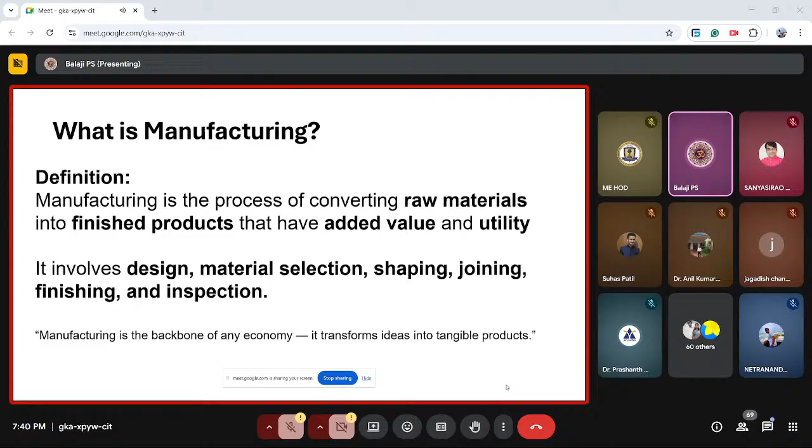Now we need to understand why we have moved from manufacturing to additive manufacturing — what reasons have pushed us. The first is the need for higher production, meaning mass production. When you develop a new product and bring it to market, as soon as commercial benefit starts, many people want to buy it, so you need to produce quickly.

Second is advancement in tools and materials. If new materials with higher strength come into the market, the tools that shape them also need higher strength, so advancement is pushed. Next is labor cost reduction — the cost of a product also covers labor cost, so if 5 laborers can do the work of 10, labor cost is reduced. Quality, precision, digital transformation, and sustainability goals are also reasons pushing us from simple manufacturing into advanced manufacturing concepts.

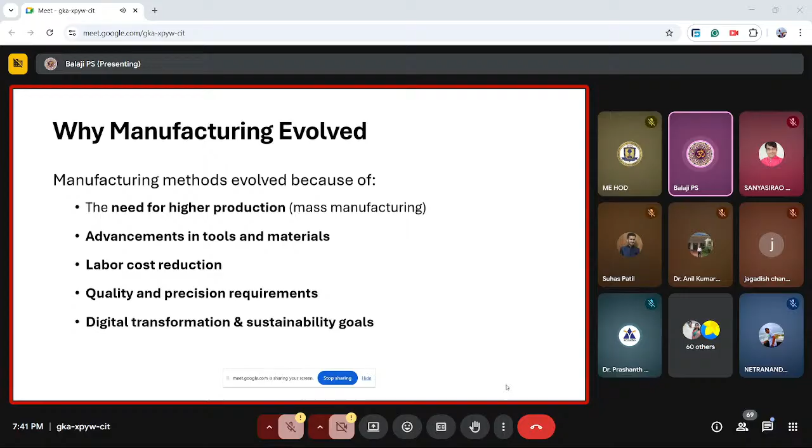If you see how manufacturing started evolving, take the Stone Age, where people made weapons used to hunt animals using a manual method to cut stones into sharp objects. Using the sharp object, they were able to hunt, eat, and enjoy the food. But sometimes the stones were very heavy and had high strength, so they could not manually do it.

So they started inventing mechanical tools to machine the material, and the transition from manual into machine happened. Then they thought, why machine it manually when I can convert it into automated by incorporating a CNC program? So from manual it went into mechanized, and from mechanized it got into automated, so now CNC programming was happening.

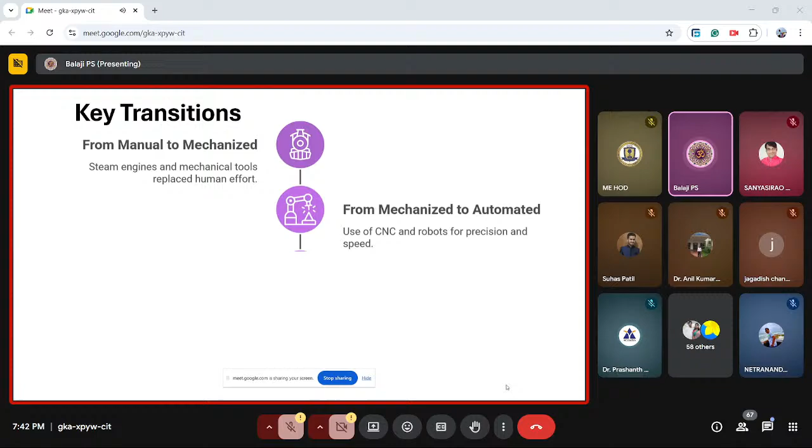On an overview, it might look like we went from manual into automated, so the job is done. No. Later, the world transformed from automated into digital. In the mechanized stage, I had to use my drawings made on paper. For example, the engineering drawings we teach students prepare them to make the CAD drawings needed for design.

But nowadays, very few people use drawings in hard copy. Majority use drawings in soft copy, and nobody is drawing the drawings manually. They only make drawings using CAD software like CATIA or SolidWorks. Once the product is ready, you can even check it using simulation, which gives a digital form of the object.

So from mechanically making, to physically making the product or design, into automated, we have reached. It might look like we have completed the circle from manual to digital, but no. Later came the advancement called additive manufacturing.

We will see how this additive manufacturing is helping us in the coming slide. But you need to understand: from manual, we went into mechanized, then automated, then digital, and finally we are in the era of additive manufacturing.

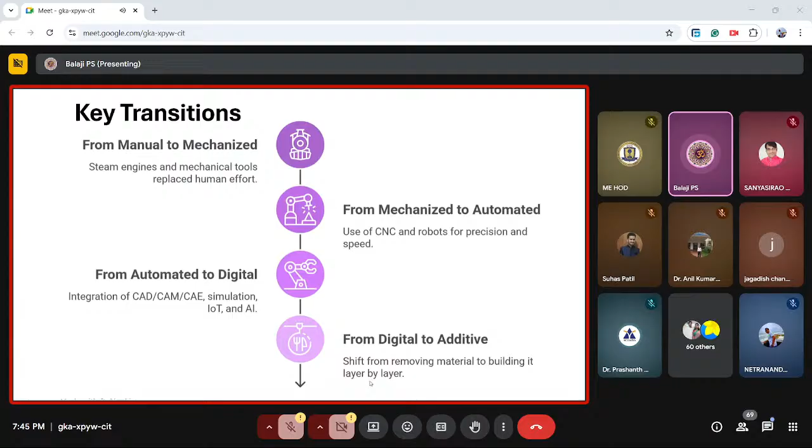So such great things are possible in additive manufacturing. In the coming years, homes of the public will also have a 3D printer, and that will become part of household appliances. So when I talk in terms of manufacturing, there are only three ways in which I can manufacture the product.

The first method is subtractive. Subtractive means what? I take a raw material, the billet — I call it billet technically — then I remove the unwanted portion of the material to get my shape. So these all come under the concept called subtractive techniques, like milling and drilling.

What I am doing in turning — I take one block, for example in a lathe machine. If I want to make a step shaft, I will take a shaft which is complete, then slowly remove some diameter of the shaft until my desired diameter is reached. Such processes are called subtractive.

So once you overcut — for example, instead of 10 mm, you cut too deep to 11 mm — is there any control possible? No, because what is already subtracted is already gone forever. So these are all concerned with subtractive manufacturing.

The second technique is called formative — giving shape to the billet. One of the easiest ways to understand formative is our roti, which we make at home. When making a roti flat, we first make a solid spherical shape of dough, then use pressing to make it flat and round. So the shape is given to a definite volume of material — this is called formative, meaning I'm forming a shape from the given input.

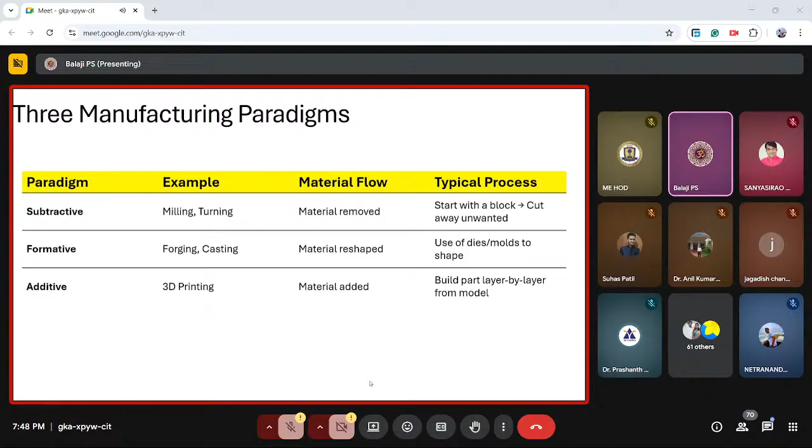Now why did additive manufacturing start coming? What is the need? If traditional processes like casting, turning, and milling could satisfy our need, we would not have gone to additive manufacturing. But still we went to it because traditional processes are efficient, but we don't have design freedom. For example, I want to make a spherical shape, but inside it some design has to be incorporated. It is not possible in a traditional process. But I can make any complicated shape and size in additive manufacturing. So the need is pushing me towards a new technique.

However, additive manufacturing is slower, but the designs it can make are unlimited. It is not limited by any kind of geometry. You can make the geometry any complex one, or you can make geometry which is simple.

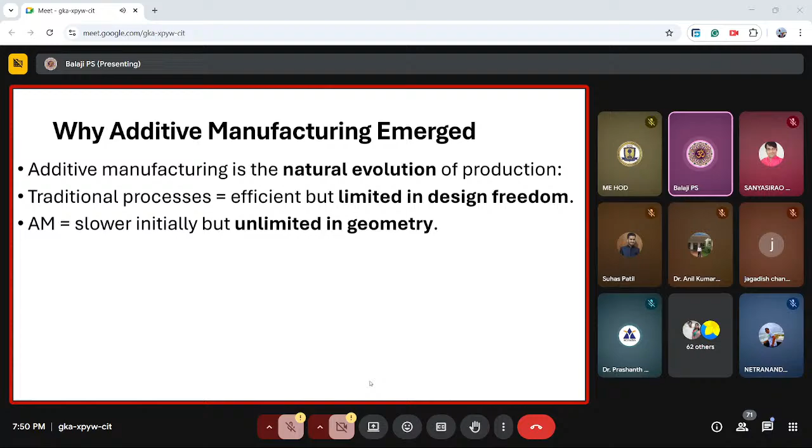But I wanted to say one thing. If we have an option between choosing additive manufacturing and traditional manufacturing, what should you choose first? There is no need to even think twice. If your traditional method can satisfy your need, please go ahead with traditional methods like milling and drilling, that is absolutely fine. You can move to additive manufacturing only when your traditional and conventional method fails. Why? Because additive manufacturing will give you a final product, but the strength of the product is not as good as with the traditional process. But you get some product which is not possible with traditional methods. So that is the added advantage.

Another major use of additive manufacturing is that I can convert a CAD model directly into a print without needing manual input. I design a model, then directly send it to the computer to print. Second, rapid prototyping is possible, which means that once I design something in my brain, how do I explain it to other people? Immediately I make a design and immediately print it. So showing is much easier than explaining in words.

And third is lightweight and optimized design. This means that if the weight has to be optimized or reduced, all of that is possible in the CAD model. So when the model is directly sent to the computer for printing, your model will also be lightweight and optimized, giving waste minimization and sustainability goals. Here we are only creating the wanted material, meaning unwanted space is not even created, so the wastage is very minimum. At the same time, you can have a filament which can be printed in any shape or size as per the requirement. If I get a requirement, I will print it. So I will only keep the raw material with me, not the complete product.

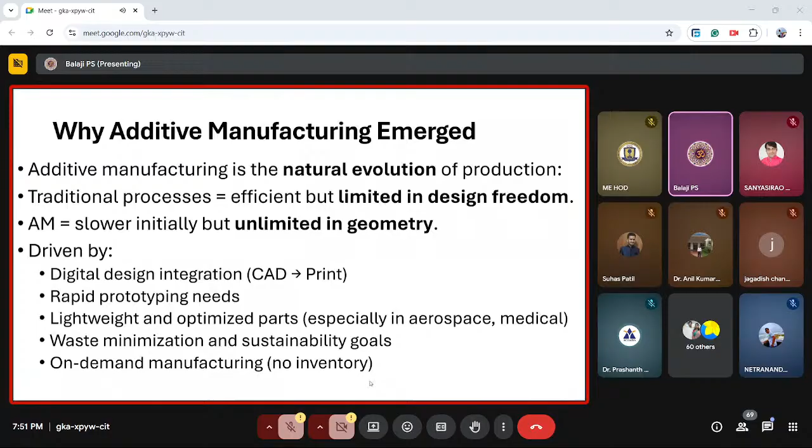So these are the advantages pushing us from the traditional method into the additive manufacturing technique. Now, how did additive manufacturing start evolving? It is 2025, so you have to go just 40 years back. The foundation of additive manufacturing started in the year 1981 in Japan. When additive manufacturing was proposed in the early stages, people could not even understand what this additive manufacturing was. They called it rapid prototyping.

How did rapid prototyping become additive manufacturing? Rapid prototyping is a concept where you need to make a small scale model of your design so that others can understand it. But in order to make the small scale model, I had to go to a manufacturer and explain my design. Instead, I will have my own manufacturing system, a 3D printer, which will design my prototype so I can show it to people. That's why the name rapid prototype started coming into use, because you can quickly make the prototype so that others can understand.

Later, slowly, improvements have driven this until the year 2025. Rapid prototyping or 3D printing has become such an advanced and mature technology that even a school kid, once he understands how to use a rapid 3D printing machine, can make use of it.

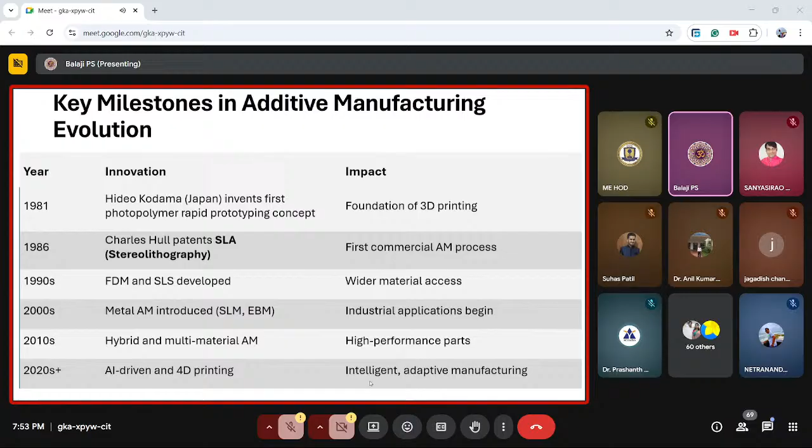So now, since all along the presentation we are going to focus on additive manufacturing. We started from what is manufacturing, then we went on to the three major paradigms: subtractive, formative, and additive. Additive manufacturing lies in the third method. We saw what is the need for additive manufacturing. Now we are coming to the actual process called additive manufacturing, so what are the step by step involved in it?

Of course, the first thing involved is having a CAD model. This CAD model can be made in any software like SolidWorks or CATIA. So many CAD models are available. The first job is whatever is in your mind, you need to put it into the model.

Once you make a model, you need to convert it into a .stl file, that is standard tessellation language, because we have a 3D printer and the CAD model is made in a software like SolidWorks or CATIA in a very specific format. This format has to be converted into a 3D printable format, the .stl format.

How to convert? It's very easy, like converting a Word file into a PDF. Just go to File, Save As, select the format and give a name. Boom, done. So converting into STL is the next step. Now we have a model in the computer converted into a .stl file. What is the next step?

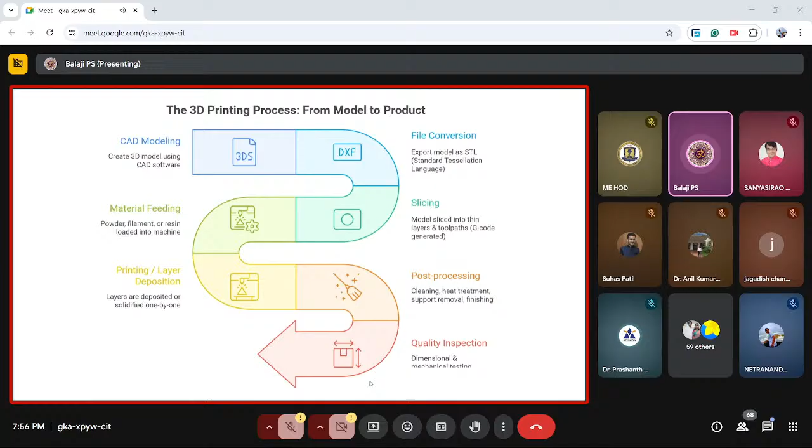Once the machine is set, it starts printing layer by layer in whatever method that 3D printer uses. Once the layer by layer is done, you do post processing. Then finally, after post processing, you remove the completed part and do a quality inspection, and your product is ready. These are the major steps in any kind of 3D printing possible.

Now you have to understand where 3D printing can be improved. At the same time, think about how nowadays the entire world is worrying about AI, AI in this, AI in that, AI everywhere. So 3D printing is also not immune to this AI craze. AI is involved in 3D printing too. So where could it be involved? You can think whether it's in CAD modeling, file conversion, slicing, or material feeding. In the coming slides, we will see the possible ways AI is currently used.

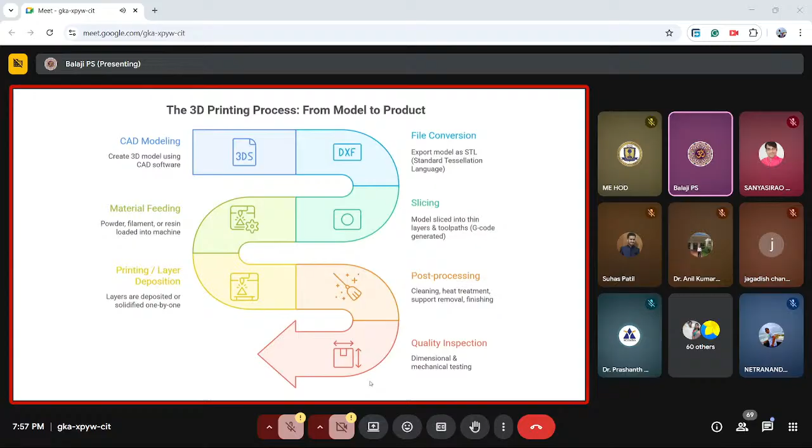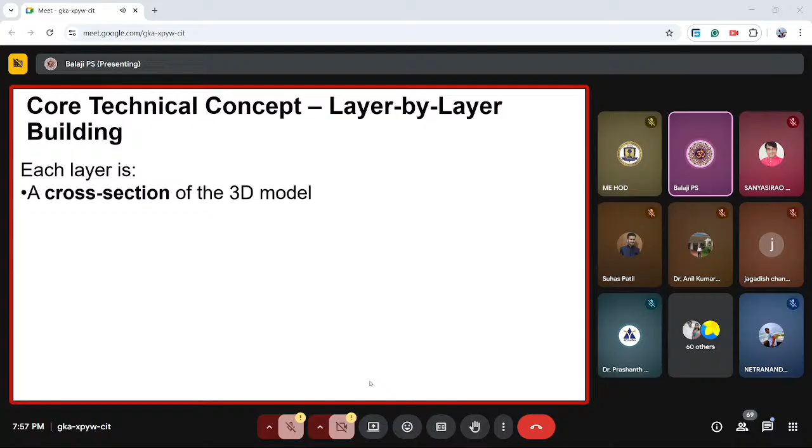Okay, so now let's go to the core and technical concept of a general 3D printing. The general 3D printing takes a cross section of the 3D model. For example, I want to print a cylinder; the cross section of a cylinder is a circle. So I'm going to print circle by circle by circle until the required thickness or length of the cylinder is reached. So the basic concept of 3D printing is it looks at the cross section of the model.

Once the cross section is identified, the material is deposited or solidified using thermal, chemical, or light energy, depending on what kind of 3D printer I'm using. For example, if I'm using FDM, fused deposition modeling, I use a thermal method to deposit and solidify. If I'm using SLA, I use some chemical process. If I'm using photo-sensitive material, then light energy is also used.

The last bonding method is layer by layer, using melting, curing, or adhesive processes. Once I make a layer on top of each layer, there's something specific I have to take care of. Once I make one layer, it's wet because I just made it. Now I'm going to make one more layer on top. But if the first layer is still soft and wet when I put the next layer on top, what will happen? My first layer will collapse. But that should not happen.

For 3D printing, we have to maintain the timing so that the first layer gets solidified, but not so much that when I put my second layer, they don't stick to each other. So I put my first layer, let it solidify some while some liquid portion is still left, then on top of it, I put my second layer.

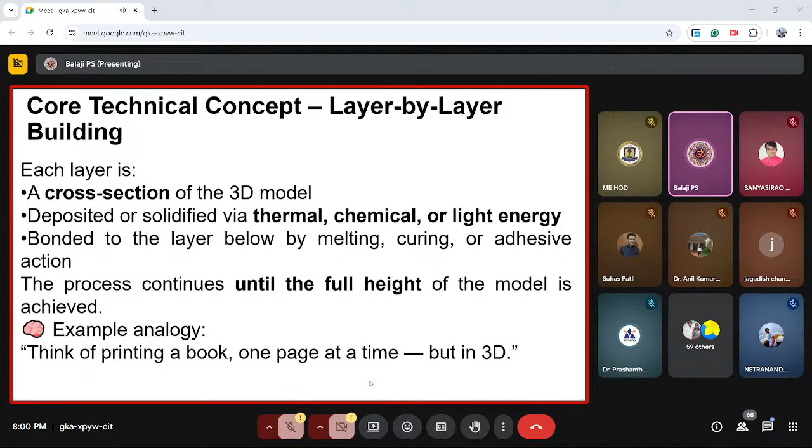So I can call it an analogy: 3D printing is nothing but printing a book one page at a time, but in 3D. You print a book page by page, and finally you get a product. This is the best example to understand how 3D printing works.

Yes, it's possible. You can make your own 3D printer. The only complication is you need to make your own G-code so that the movement of the nozzle can be programmed as per the cross section. If you're still struggling, don't worry—on Amazon you can even get a simple 3D printer for 25,000. So whether you buy a 3D printer for 25,000 or for 3 lakh, the parts of a general 3D printer remain the same. For example, the kind of 3D printer we're showing is FDM.

There will be a filament which starts from the top—that is the material going inside. Then you have the extruder, because filament is a thin solid and I want to melt it. The melting happens in the extruder. The extruder also pulls the material and feeds it into what's called the hot end. In the hot end, there's a nozzle that takes the filament and makes it semi-solid, not exactly liquid.

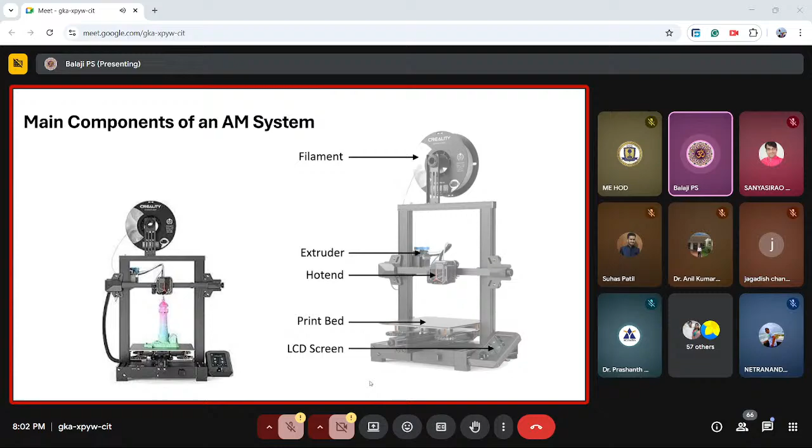Now, still, you have to think about what kind of advancements and where AI is incorporated. Keep thinking about it—we'll come to that part later in the slide.

Now, what kind of materials can I print? Can I print all materials? The answer is simple: no. You can only print certain materials. For example, you can print polymers. Common examples are ABS, PLA, nylon, PETG, and polycarbonate. These are the materials we generally use.

We even use TPG, and TPU as well. These are used for prototyping tools and functional parts. In polymers, the problem is they are very plastic-like, in layman language, so mostly I can use them for display purposes only. For structural purposes, polymers may not have great strength.

So we went into metal-based 3D printers. Metal-based 3D printers can print materials like titanium, stainless steel, aluminum, inconel, cobalt, and so on. Since they're metal, they have good strength, so they're useful even in aerospace applications. Ceramic and composite materials are also possible, like silica and alumina. Ceramic-based 3D printers use high temperatures and very specific processes.

There are even other materials like bio-materials. Nowadays, you are getting 3D printed food.

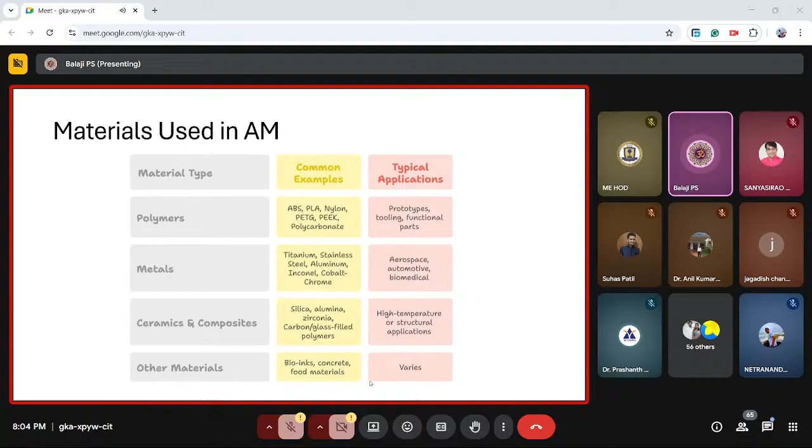3D printed material used for mechanical or aerospace is still understandable, but in future, 3D printers will also be part of the kitchen, but they are a specific kind of 3D printer, they print food. For example, you want a burger, you don't have to make the burger, instead you can 3D print it. The day is not very long, it is coming.

Now, how does 3D printer performance compare with conventional? First is material use. If you talk from material use point of view, 3D printer uses only the required portion of the material, so I can say minimal waste.

You can ask, sir, if you are only printing a required portion, where is the waste actually coming? Because when I do a 3D print, I have to create some support structures for my printer, which after printing are waste only. Support structures, we will see deeper later, but they are like when I print a lengthy material or product, I need to give some support so those parts don't fall down. Once the print is done, the support structure can be removed, so they are waste, but very minimal compared to the waste created by the conventional process.

Second is in terms of design, there is no limitation, you can design anything. For example, a sphere having another sphere inside it, and another sphere inside that sphere. This is not possible in conventional manufacturing, but possible in additive manufacturing.

Next is tools requirement. If I want to use casting or forging, I need to have a die first, and then I have to have a mold and cutter. But with additive manufacturing, one machine works for all shapes and sizes. Of course, the 3D printer has a limitation of how much it can print, but within that, you can print anything.

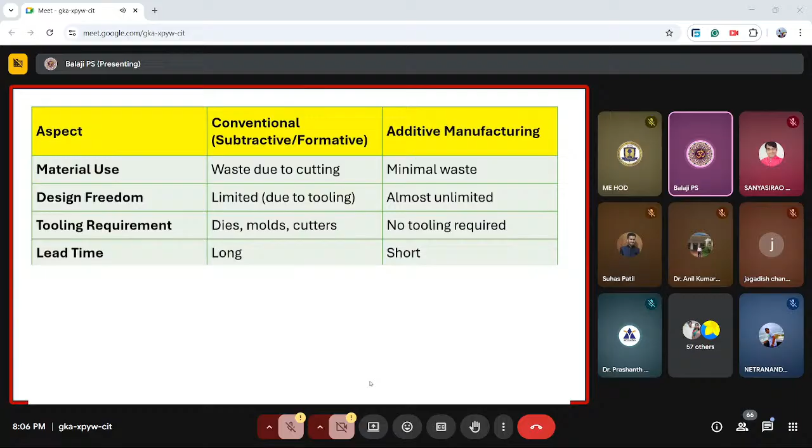Lead time is very important - what is lead time? It's the day from which the component is designed to the day the final output product is made. If you take conventional manufacturing, after making a design I have to make the tools, dies, and molds, so the time taken to convert design into product is very long. But with a 3D printer, directly design, go to the printer, and print it immediately. So lead time is much shorter. Of course, time is taken for printing the material, 8 hours, 10 hours, depending on complexity, but it compares favorably to conventional where I first have to make the die and tools.

Second is economy. Conventional is good for mass production, but additive manufacturing is good for customization. For example, customization in the sense I want to print a coffee mug, but on each mug I want to write a different name. Then I'd have to make specific conventional dies and molds for that. Once made, I can mass produce, but if I want to make only one, conventional is not suitable, so I use additive manufacturing instead.

Repair and modification is very easy because the portion which got broken, I can print again on top of it, but conventional is a little difficult. Complexity increases with design or cost in conventional, but in additive manufacturing it is independent - whatever you make, it is possible.

Now you have to understand, when you go to a shop and ask them to 3D print a material, the charge is whatever the person asks based on time taken to print and amount of material needed, not on the design or complexity of the design. So your payment is based on the volume of material, not the design - whether simple or complex doesn't matter, only the amount of material used matters. So please understand, when trying to print anything from any company, make sure the charges are based on volume of material.

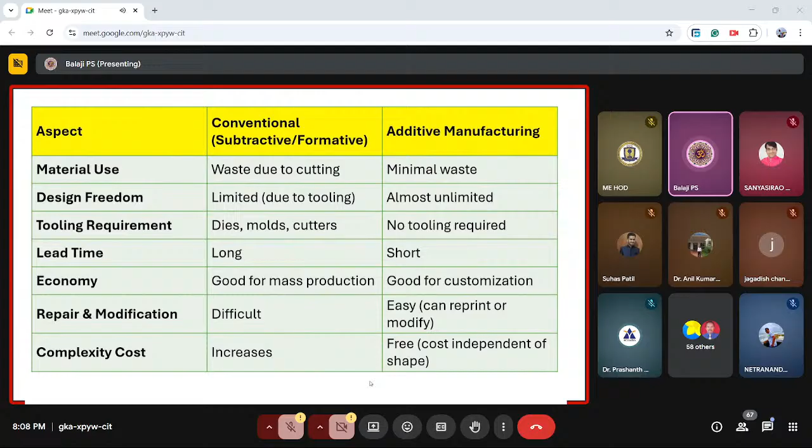Now, when 3D printing, what are the parameters that influence it? We will go over some parameters so the advancements can be understood easily. First is the layer thickness - since I'm printing layer by layer, the thickness of the layer affects the surface finish and quality of the material. Second is build orientation.

For example, a cylinder, I can print circle by circle in a complete vertical direction, or along the length it is rectangle by rectangle. So I can print rectangle above rectangle also. But it's common sense that circle by circle is better if I print a cylinder. So the build orientation has to be decided based on how you want to build, because it also affects the strength.

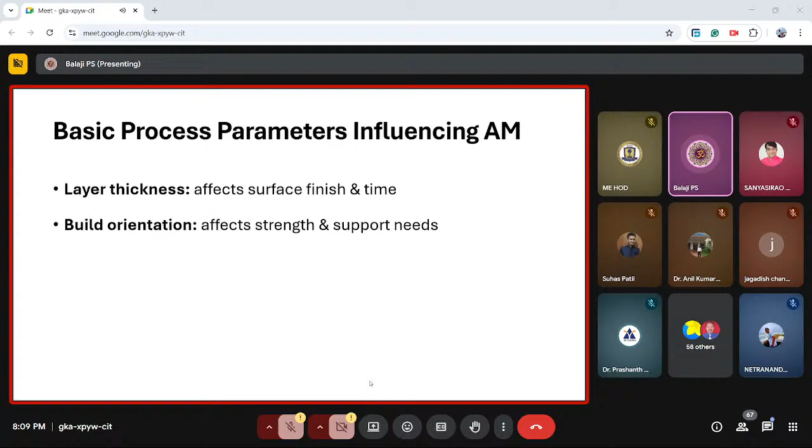Always understand that it is better to have the layer along the loading direction. If the layer length is 90 degrees to loading, then your material will fail. Better to have the layers along the loading direction.

Second is the speed at which you want to print. You can print the material very fast or very slow. But if you print very fast, layer by layer time won't be available for the adhesive to stick together, so the material will fail. And second is cooling rate.

You already know from the annealing process what we follow. If you cool them very quickly, they become brittle, because the cooling also affects the microstructure. But in 3D printing, it has to be cooled at a certain rate so that the 3D layer by layer can be made. So this cooling rate also decides the microstructural behavior.

Finally, one important thing is infill density. If I want to make a cylinder, can I make only the outside skin, or should the inside also have material? That becomes the infill density. If I don't need inside material, I can only create the outside skin, depending on the application - for example, if it's only for showcase, I'll only print the outside shell. But if I want to use the cylinder for some application that needs strength, then I'll fill the inside of the material also, so that strength can be given. So that control is with you, how much you want to fill inside.

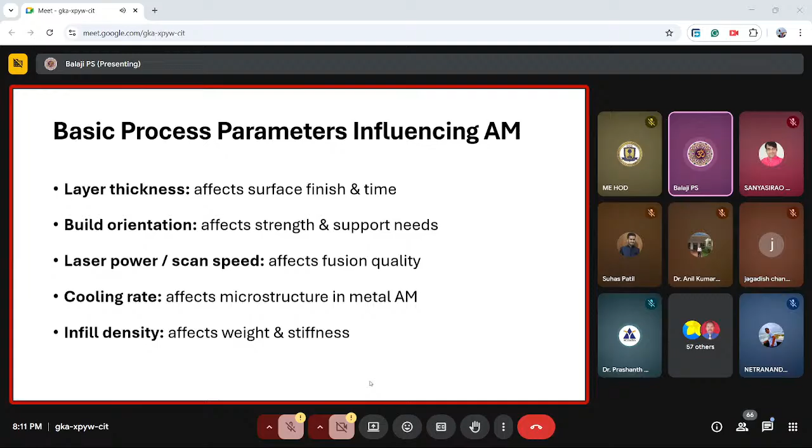So these are the very major design parameters: layer thickness, build orientation, laser power, cooling rate, and infill density.

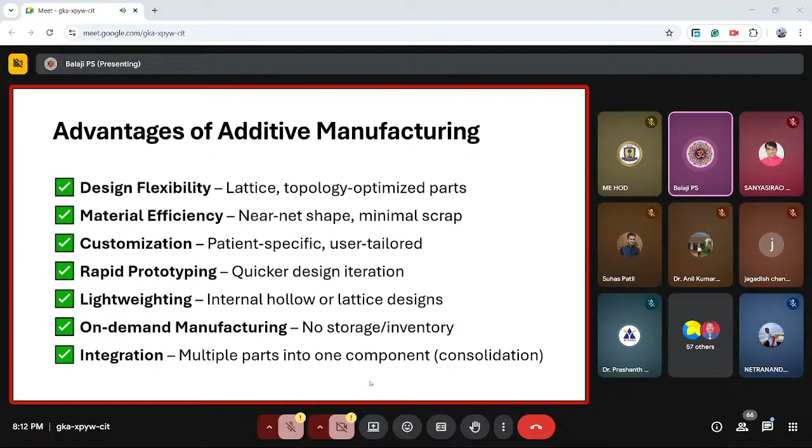Now, what are the advantages of additive manufacturing? We are all thinking about additive manufacturing, and we even compared it with conventional manufacturing on specific parameters. The advantages are design flexibility, because your design is not affected, material efficiency, because any shape you can make, customization, rapid prototyping, lightweight, on-demand manufacturing, and integration. So all these advantages make you feel like let's scrap all other manufacturing processes and let everybody shift to additive manufacturing. No, that is not possible, because they also have some limitations.

The limitations are slow build up rate, which means it takes a lot of time to make a product, and limited build size, which means the size of the product depends on the size of the 3D printer. Surface roughness is an issue, because layer thickness affects surface roughness. And anisotropic material property, because the layer direction also defines the material property. Definitely post processing is required, and there's high cost for metal systems.

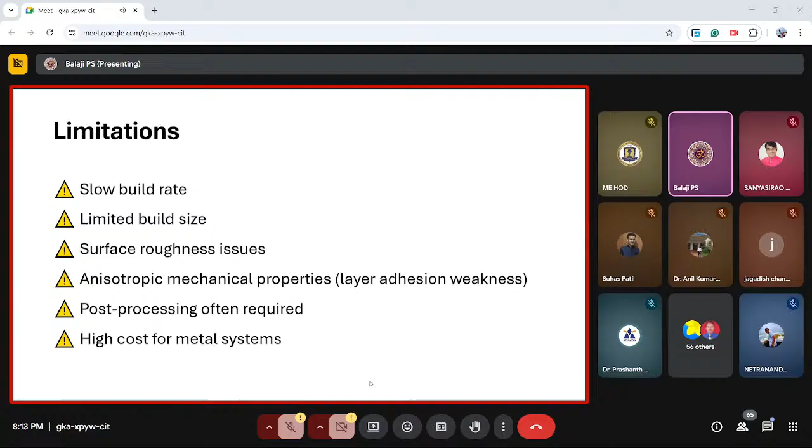So now, what are the errors? If I make a material, will it be 100% error proof? No, there are certain errors. One is porosity - the material may not be completely solid, some air pockets are possible.

Warping, because of sudden cooling and sudden heating - you're heating and then suddenly cooling. If you are making a cylinder, one end of the diameter may be smaller and the other end may be bigger, so the uniformity may not be there.

Cracking - between the layers, if they are not sticking together properly, cracking is possible. Surface roughness, if the layers are not properly made. Delamination, again is layer to layer separation. Dimensional error, because during STL file conversion, your model dimensions can be slightly affected. And contamination - if you are printing in a contaminated area, dust can form and affect the print. So these are the defects possible in 3D printing, which have to be avoided.

So far, we have talked about a basic understanding of the 3D printer, how a 3D printer established from nothing to something very big. When it is trying to become something very big, we also see what are the basics and fundamentals that are needed. So we will see some new techniques that have come in the 3D printer, which are very new. Let's see them. First is material extrusion.

This is nothing but FDM, which you might all have seen. This is not a highly advanced method, but now a lot of new options started coming in material extrusion that you can control through the nozzle. In fact, new innovations can even come in the nozzle diameter, so that the speed at which material printing happens can be controlled. As of now, nozzle diameter for a specific case is fixed, but there are certain systems coming up which can have very different nozzle diameters. These are some new innovations that are coming.

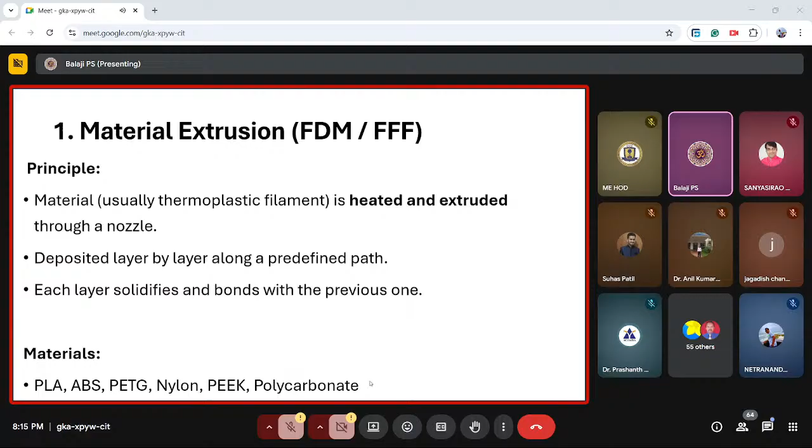The first method is a very basic method that already exists, but the second method is something very new. The second method is called vat photopolymerization, which comes under SLA or DLP. A liquid photopolymer resin is cured layer by layer using UV lights and laser - this is like the SLA type. But within SLA, a new type called DLP, digital light processing, is coming up, in which projected lights are used towards specific directions to cure the material. These are very useful for materials that are light sensitive, especially epoxy and acrylic.

So vat photopolymerization in DLP and SLA are coming up. The second thing is material jetting or polyjet. Similar to inkjet printing, here droplets of polymer are jetted from multiple nozzles and cured by UV light instantly. In FDM, we are creating layer by layer - the filament is heated and deposited in a semi-solid format. But in material jetting, photopolymer droplets in liquid format are sprayed using multiple nozzles and immediately cured by UV light. So instantly, liquid is converted into solid and layer by layer is created. Here, multiple materials and multiple colors are also possible.

For example, if I want to print a blue color material in FDM, I have to buy blue color filament and the entire material will be blue. If in between the color has to be different, I cannot do it in FDM. But in material jetting, MJ, new techniques have started coming up in which different kinds of colors are possible, different materials are also possible within the same design. So materials that are photo sensitive to UV lights are possible.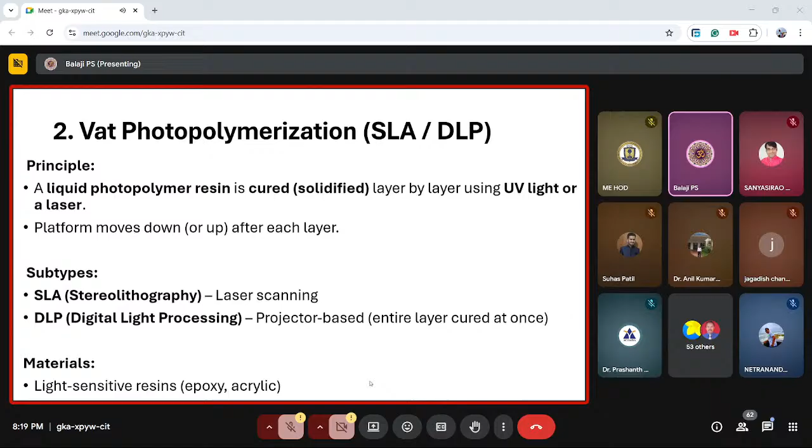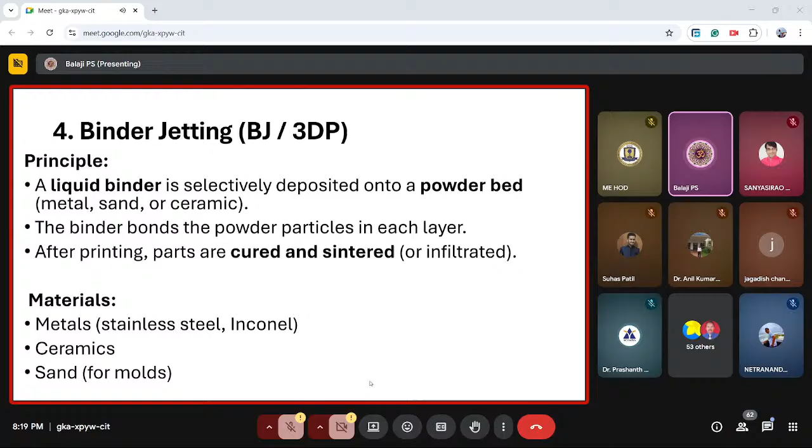So if you go back from the first method, FDM already exists. Let's start understanding again. The second is photopolymerization, in which photopolymer resins are used, developing layer by layer using UV light. So first is the FDM method, second is vat photopolymerization, third is material jetting - making droplets of polymer and creating the component. And fourth is binder jetting. These are the latest advancements or different types of 3D printing coming up in the market. As we saw, using liquid binder, metals such as ceramic, sand, or metals are all possible in this one.

The fifth one is powder bed fusion. This is one of the very industry-significant categories - you can write it down, powdered bed fusion. Here, it is more or less equivalent to the previous method. Powder is sprayed on a bed using a laser or electron beam, and the powders melt and fuse together.

So layer by layer, powder is sprayed and heated with a laser, and the material melts and fuses together. There are subtypes already known: selective laser sintering, selective laser melting, and electron beam melting. The major advantage is electron beam melting is also available, which uses this powder bed. Powder bed is actually what we use in industries. The materials include nylon, TPU, metals, titanium, aluminum, stainless steel, inconel - all are possible.

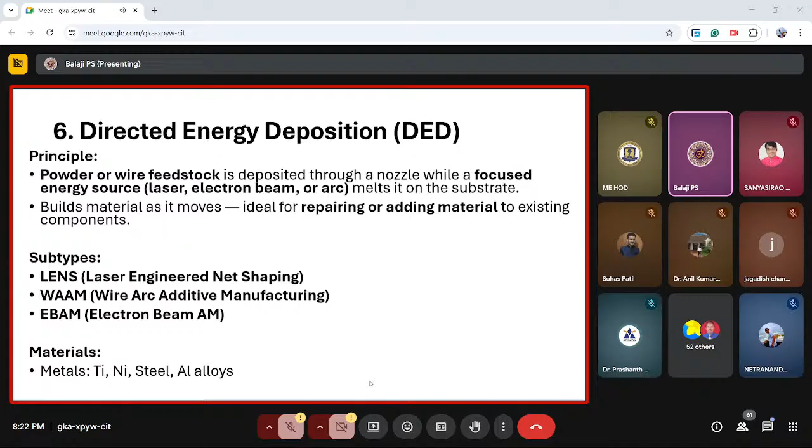The sixth method is directed energy deposition. Powder or wire feedstock is deposited through a nozzle, and it is much more similar to the previous method. The only difference is we are using a nozzle through which I am focusing a laser light. Since I am targeting the material using a nozzle, it comes under the concept called directed energy deposition. In the previous case, a laser or electron beam is sprayed throughout the layer at a time, but here a specific target is used to direct the energy. This has subtypes like laser engineered net shaping, wire arc additive manufacturing, and electron beam techniques, which are new kinds of techniques coming up in the market.

The seventh and very recent one is sheet lamination. Here sheets of material are stacked and bonded layer by layer, instead of making them - already sheet material is available. I can go to a company where sheet metals are available at specific thickness, buy them, and manually keep one over the other. That is called sheet lamination. Then I can stack them and bond them layer by layer, and then cut the shape - meaning layer by layer I paste all the material and cut the shape of it, which is what is called sheet lamination.

Here 3D printing is not needed. You have to manually keep the layer on top of each other through some specific bond, and then using a laser you can cut it. There are subtypes like laminated object manufacturing or ultrasonic additive manufacturing. The materials possible under these techniques are paper, plastics, polymer, aluminum, titanium, and foils.

Now you need to understand one common knowledge or alertness. When there is a negative mindset that no more invention is possible, then nothing would have gotten invented even now. When the telephone was invented for the first time, people thought they had achieved the ultimate product needed for the rest of their life. But as soon as they started using it, they understood that in order for somebody to call and answer you, you should be at home. If you are not at home, then the telephone may not be useful. So then people thought, I need to carry the mobile with me.

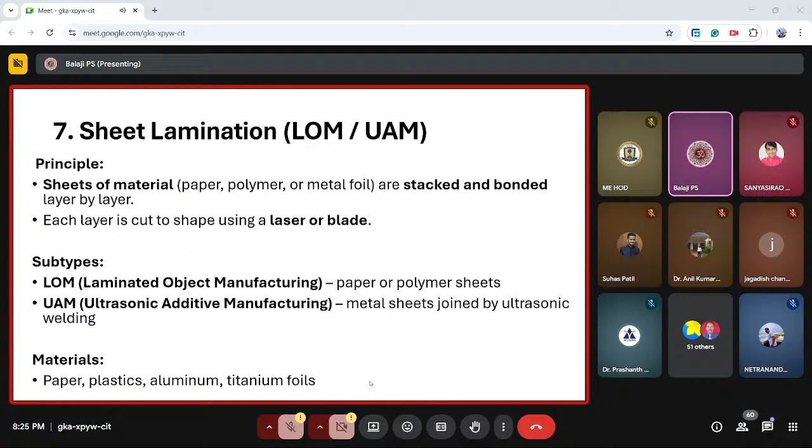So across all the different kinds of techniques we saw, improvements are always possible. These are the seven improvements we wanted to cover. Next, we will be moving on to AI. But before that, let me show you this particular slide where the summary of all the methods we discussed, along with their positives and negatives, are compared.

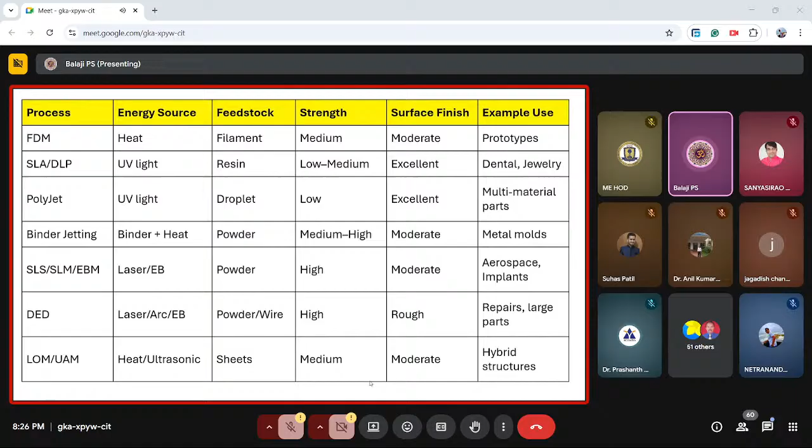But now let's move on to the very core of the advancement needed in additive manufacturing. Artificial intelligence refers to a system that can analyze data, learn patterns, and make intelligent decisions, and often faster. What is not possible by the human brain is not possible even by artificial intelligence. The only thing we want to understand is that the human brain is always superior. Whatever artificial intelligence we are developing is not so superior like a human brain.

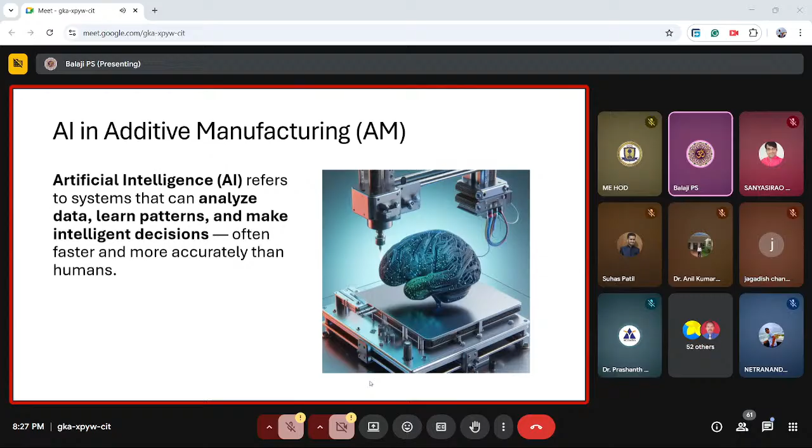You can think of it like this: the limitation of the thinking capacity of the human brain is limited by the capacity of the brain itself. How can that limited brain develop a technology which can be more intelligent than the brain itself? I personally believe AI can only be created by some system that has more intelligence than the human brain. As of now, AI may be faster than humans and may have thinking capacity, but AI can never replace the human brain in its functions. However, it can help you solve your problems in a much easier and simpler manner.

We will see how this is possible in additive manufacturing techniques. The first and foremost application of AI in additive manufacturing comes in design optimization. When I make a design manually, I put in my idea and create a model, and that model might satisfy my need, but it may not be the optimized model. So in design optimization, AI plays a very major role. I'm literally telling you, if you are not using AI in design optimization, then there is no use using AI for the rest of the methods, because this is the fundamental place where AI can play a role.

For example, I can share one small experience. In my lab, we are developing a vibration isolator using a 3D printing technique with a polymer-based FDM printer. Once the isolator is printed, we test it in our vibration shaker experiment setup to see how much vibration it reduces for a given mass. By keeping some specific mass, we tested one, but our vibration isolators were not optimized when we designed them initially. Then we optimize them by creating some kind of programs and limitations to optimize the shapes, then we go for the final printing. So this optimization is done by AI.

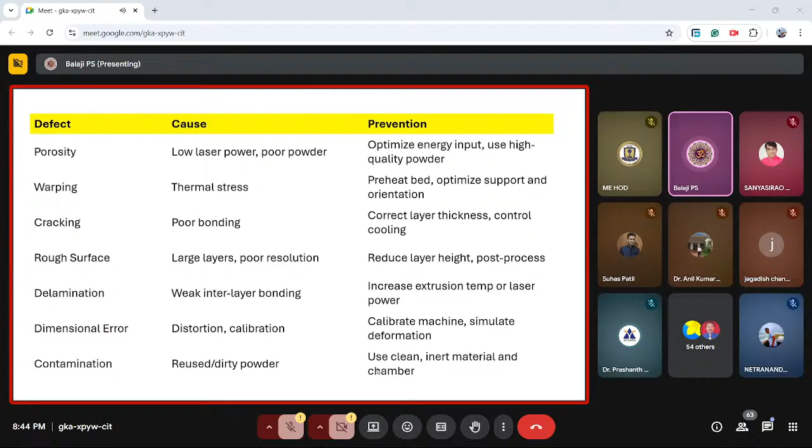The reader reads the paper and happily goes forward. Of course, you get a citation - citation adds value, but only in the paper. Physically, it doesn't add much value to you. Only a product can physically add value to you. So that is the one point I wanted to add with respect to the kind of research you want to do.

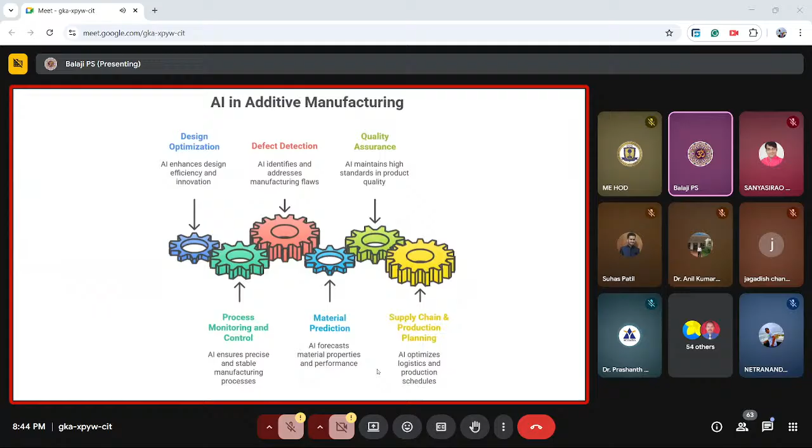So these are the major topics I wanted to share with the viewers on how advancements in additive manufacturing are made, and what kind of future research is still possible in additive manufacturing techniques. With that, I would like to finish my presentation. Thank you very much, and here is my mail ID.

Here I'd like to add one point - NIT Rourkela, Dr. Bhargav already knows, he is from my lab. We have a lab called Materials and Wave Propagation Lab, where our basic fundamental work involves having a lot of 3D printers, and we print a lot of materials. If you have any requirement in 3D printing, or want to know further about 3D printers, or want to print a specific design for your research, please don't feel shy - you can directly mail me. We have different kinds of 3D printers, but all are polymer based, not metal. NIT Rourkela is still in the process of procuring metal-based printers. You can write a mail to me, and I will definitely assist you in helping you make a 3D print. I can even suggest some new changes you can make to print efficiently.